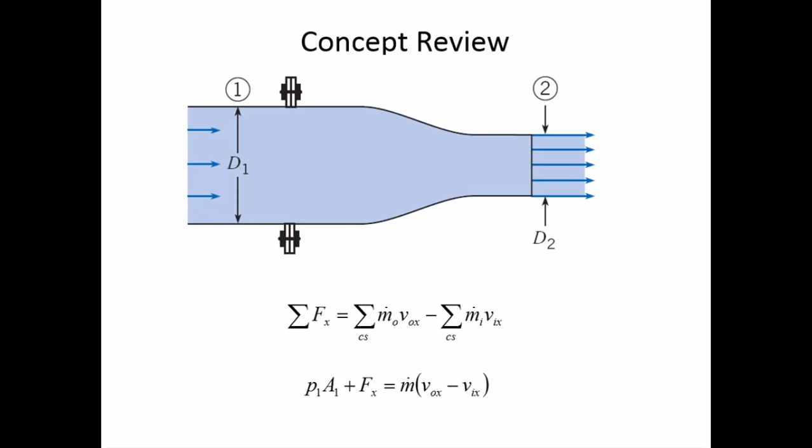All right, let's work through this vane example. We've got a water jet with a speed of 6 meters per second, and the mass flow rate is defined, and it's simply changing direction by a fixed vane. This is actually going to be pretty straightforward because there aren't any pressure forces that have to be accounted for.

It enters with only flow in the x direction, and it exits with flow both in x and y. But it's going to be relatively simple here. It won't be the combination of any other fluid mechanics principles. We start off by knowing that the mass flow rate is 11.3 kilograms per second and that the velocity is 6.0 meters per second.

In this example, we have a vane, meaning that there's a piece of metal, some other material, that's deflecting a fluid jet. So the fluid jet is impacting this and is changing directions, and it exits with a different angle than it did before. The information that we're given is that there's a 30-degree angle between the horizon and the downward direction that this jet of water exits the vane.

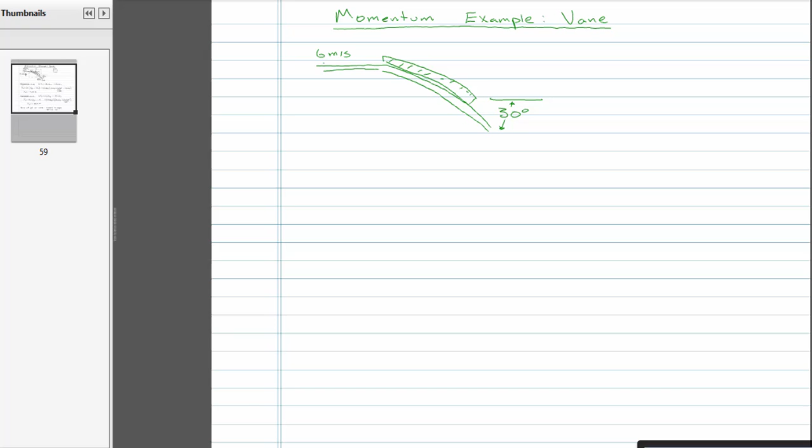The water is 6 meters per second, and we're not given any information about whether it's slowing down, so we assume that it has 6 meters per second as it enters and also as it exits our control surface. We are given the mass flow rate as 11.3 kilograms per second. And it's asking to find the force of the water jet on the vane.

So we have to be careful because normally when we solve the momentum equation, we're solving for the force required to hold the system steady. But this is asking for the equal and opposite reaction. So when the time comes, we'll keep that in mind. First of all, let's apply the momentum principle in the x direction. So momentum in x.

All right, in the x direction, we have the sum of the forces in x are the mass flow rate out, the velocity out in x, minus the mass flow rate in, times the velocity in x. In the x direction, there is both in and out. So this is the flow that's going in through the control surface, and here's the flow that's coming out through the control surface.

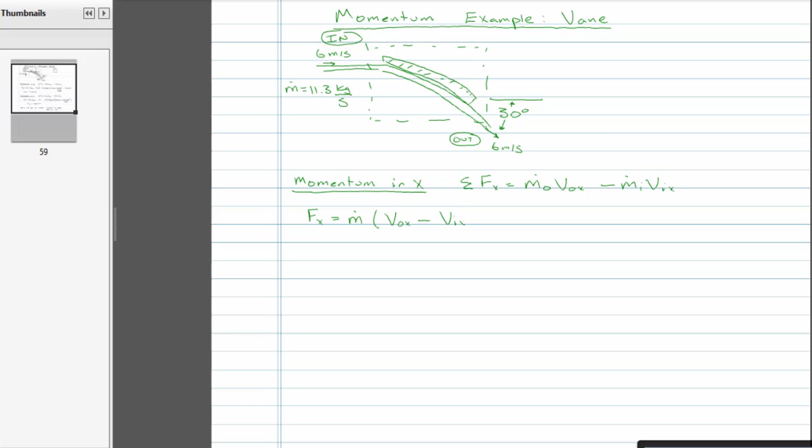The force required to hold the system steady in the x direction will be the mass flow rate. And since the mass flow rate in and out are the same, we can simplify the equation just to the velocity out in x minus the velocity in x, like that. So the magnitude of the velocity is 6 meters per second for both of them, but the velocity out, we want to find just the horizontal component of that 6 meters per second.

So when we make the substitution, it's going to be 11.3 kilograms per second. Now the velocity out in x is going to be the velocity of 6 meters per second. It's a positive 6 because it's still to the right in the x direction. But we have to multiply that by the cosine of 30 degrees in order to get the component that's in the x direction, and then subtract the velocity in x. And the velocity in x is 6 meters per second. That's a positive value because it's to the right.

So the force required in the x direction is negative 9.08 newtons. This cosine of 30 is 0.866, meaning that the flow in is going to give us more momentum than the flow out in the x direction, and that's why it's a net negative value. So that's a force to the left to hold the system steady. If we were holding the system steady with an external force, it would need to be this way. The force would be to the left.

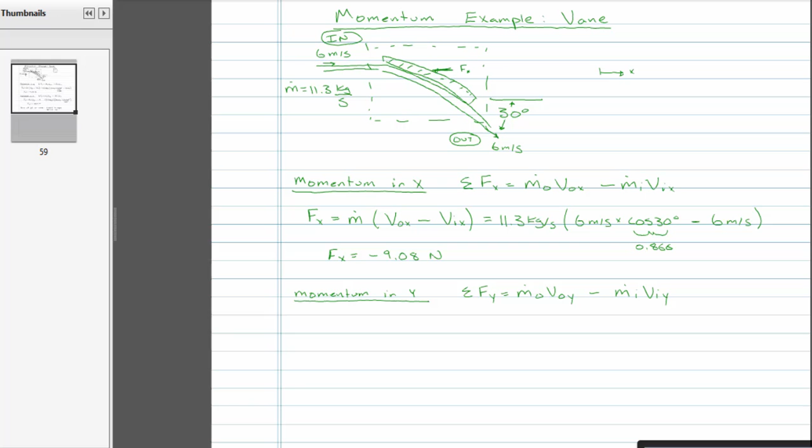The mass flow rate out, we know that the mass flow rate is 11.3 kilograms per second, and then we're going to multiply that by the velocity out in y. Well, the velocity is 6 meters per second, and it's down, so we have to give it a negative sign in front of that value, because down is, in our sign convention, going to be negative since up is positive. And then multiply that by the component of the velocity that is vertical.

So we did cosine of 30 before, so that means we're going to have to do the sine of 30 degrees for this one. And the sine of 30 degrees is 0.5. And again, there's no mass flow rate in term for us to worry about. So the force in y required to hold the system steady is going to be negative 33.9 newtons, meaning that we would have to push down. The jet would cause that vane to rise if we weren't pushing down in the y direction.

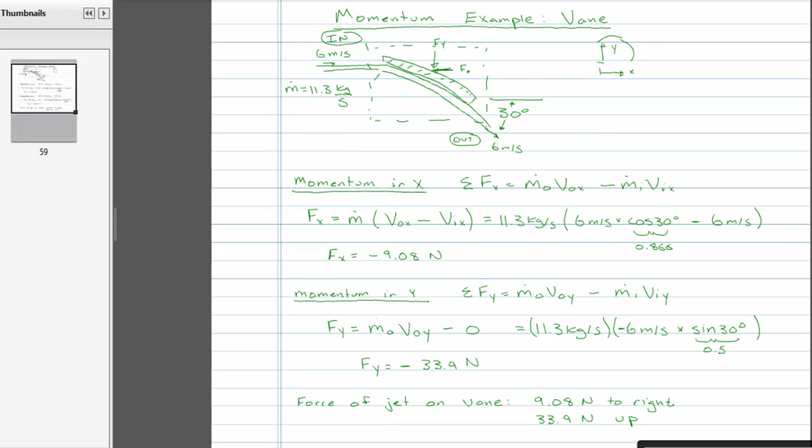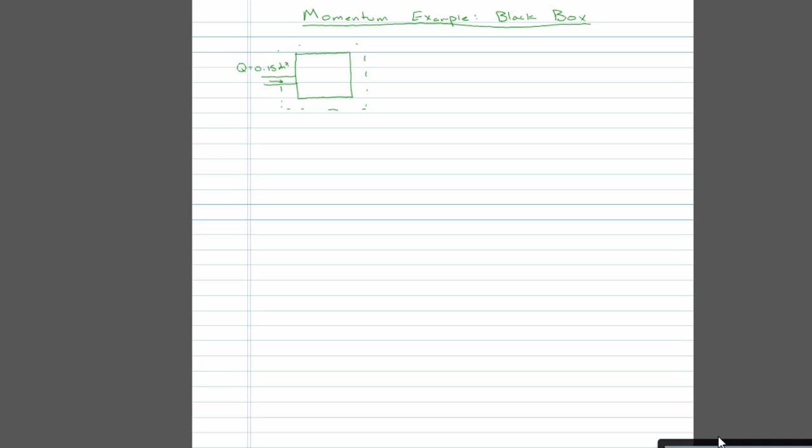There's a jet of water that has a volumetric flow rate Q is 0.15 cubic meters per second, and we're given that the velocity in is 60 meters per second at that boundary. And there's a jet that's coming out right here and we know that the velocity of that jet is 15 meters per second, but we're not given the mass flow rate. There's another jet here that's coming in. We are given both the volumetric flow rate of 0.30 meters cubed per second, and the velocity is 30 meters per second.

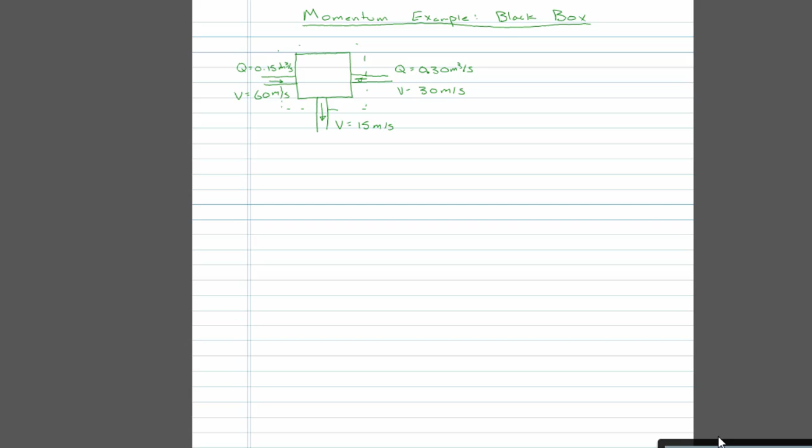And then finally there's another exit stream here, and that exit stream we're given the flow rate to be 0.10 cubic meters per second, and the velocity is known to be 20 meters per second. We're going to have to apply the momentum expression in both the x and y direction. Just for simplicity, I've labeled each of these streams. I'm labeling this stream 1, and then we have stream 2, stream 3, and you guessed it, stream 4.

Alright, let's start by looking at things in the x direction. Consider the momentum in x. So in the x direction, there's no mass flow out. There's only flow in the x direction. So that when we have the sum of the forces required to hold the system steady in the x direction, that's the mass flow rate out, velocity out in x.

And by the way, I should say the sum of the components that are flowing out minus the sum of the components that are flowing in x. So there's no flow out in the x direction. You can see both stream 2 and stream 4 going into the black box. So that means that this term is 0.

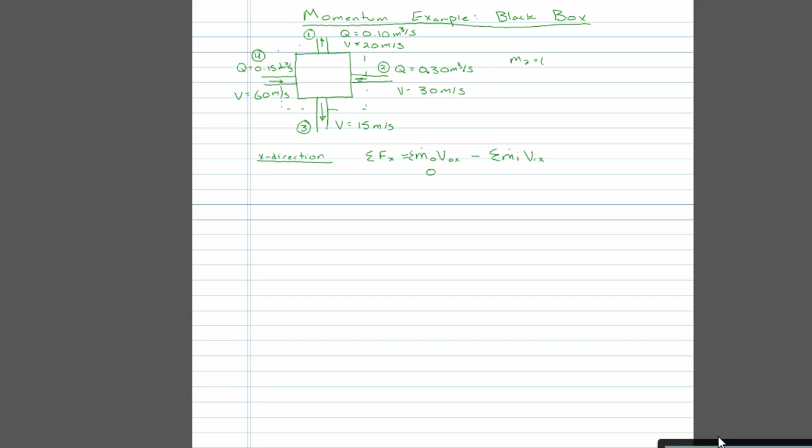Let's take a look at the mass flow rates of stream 2 and stream 4. The mass flow rate for 2 is going to be... this liquid has a specific gravity of 2.0. So for Sg of 2.0, that means the density is 2,000 kilograms per cubic meter, because it's double the density of water. That's what Sg of 2.0 means.

Okay, so the mass flow rate of stream 2 is going to be 2,000 kilograms per cubic meter times the flow rate of 0.30 cubic meters per second. The mass flow rate of stream 2 is 600 kilograms per second. Mass flow rate for stream 4 is likewise 2,000 kilograms per cubic meter. This time though, the volumetric flow rate is 0.15 cubic meters per second. Gives us a mass flow rate of 300 kilograms per second.

Let's apply this in the x direction. Okay, so the force required to hold the system steady in the x direction is going to be the mass flow rate out, which there is none, minus, now it doesn't matter which stream we consider first. Let's take a look at stream 2. Stream 2 has a mass flow rate of 300 kilograms per second, and we need to multiply that by the velocity for stream 2. So stream 2, 300, that was stream 4. So the mass flow rate of 4, and now let's do the velocity of 4.

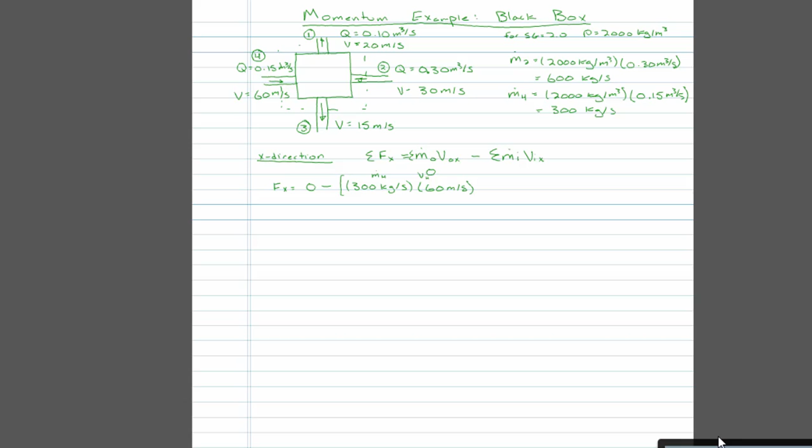Now velocity of 4 is 60 meters per second, and that's to the right, so I'm leaving it as positive 60. Now we will do the mass flow rate of stream 2 and the velocity of stream 2. So the mass flow rate of stream 2 was 600 kilograms per second, and then the velocity is negative 30 meters per second. I should have made that as a plus. I guess it's a negative sign if you don't put the negative into here, but I think it's probably more consistent if I put the negative sign right by the velocity there.

So it is the 300 kilograms per second at 60 meters per second from here at stream 4. And you can sort of tell that you'd have to push to the left in order to hold that steady. But then the other stream, you're going to have to push to the right to hold stream 2 steady. The force in the x direction is going to be canceling out, because 300 times 60 and 600 times 30 balances out. So in other words, those two jets counteract each other, and no external force in the x direction is required to hold it steady, since the two jets counterbalance one another.

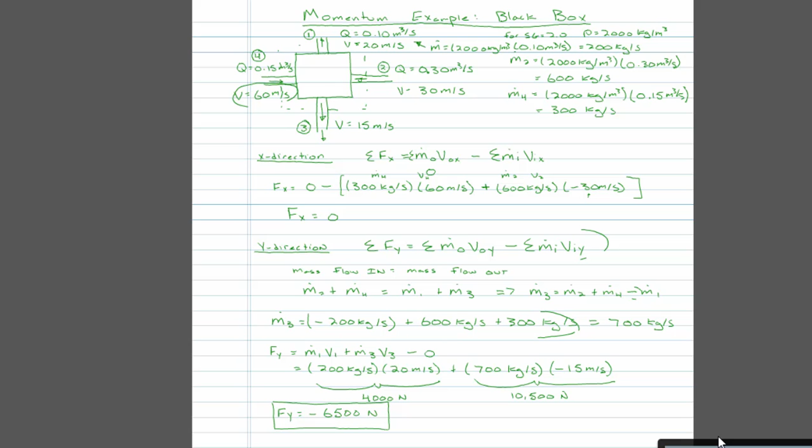All right. Well, the U.S. Navy has a series of boats called LCACs. LCAC stands for Landing Craft Air Cushion. And these are pretty amazing machines. As you can see from the image there, they have the ability to land a full-size main battle tank, or 180 troops can be on the deck of it, or they could put 4 light armor vehicles, which are themselves pretty big machines. They can go about 80 miles per hour, which is a lot faster than an ordinary ship.

An ordinary ship that's down in the water faces quite a bit of resistance to moving at that speed, but an LCAC, by contrast, floats above the water. The curtain of the LCAC, when it's operating, is actually up above the water so that it has much less resistance to movement, and that's why it's able to achieve such a high velocity. And that comes at a cost, though. It burns 1,000 gallons of fuel per hour. Think about what your fuel costs would be.

The engines in these LCACs, if I remember correctly, are able to burn a variety of fuels, but most of the time what they'll put into it is jet fuel. It's actually a gas turbine, and jet fuel is very expensive because it has a very high octane. Jet fuel doesn't combust as easily. It burns at a higher temperature.

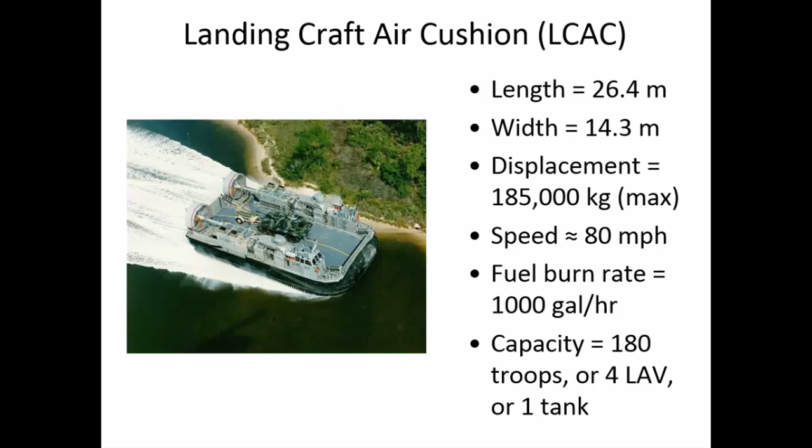And so, like, I was up at the Tri-State Airport a couple of months ago, and they have a flight operations office off the main building there, and they were charging something like $6 a gallon for jet fuel at that point. And so it's $6,000 per hour that you're spending to run one of those things. But when you need to take a tank inshore at 80 miles per hour, then it's your best option, I guess. So it's interesting from a fluid mechanics standpoint as well. Let's take a look at this video, and then we'll talk about the way that the LCAC operates.

It's just to get troops and equipment on shore quickly. Yep. Nope. Nope, but they're fast, and they can clear obstacles too. Like you know, an ordinary boat that's landing troops on shore would have to stop at the beach because it has to only go where the water is. But this could go a mile inland if it had a path free of obstacles. So it can establish a much deeper beachhead very quickly.

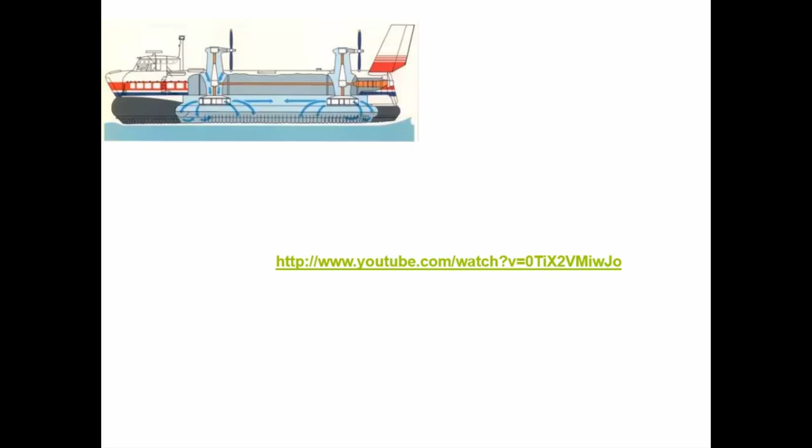Let's take a look at an example that uses this hovercraft as a starting point. We're going to work through this example and try and calculate four things. First of all, just a simple drawing of the LCAC, and I'd like you to try this without watching what I do. I'd like you to sketch, based on momentum, how you think this thing works. How is it able to lift up the load, and how is it able to achieve a forward movement? So do a little sketch in the margin of your notes.

Secondly, I'd like you to calculate the air pressure required in order to lift the fully loaded LCAC up off of the ground or up off of the water. Fully loaded, it's 185,000 kilograms, and the dimensions are 26.4 meters long, 14.3 meters wide. And those are actually real-world figures that I was able to look up.

Third, we're going to go through and calculate the thrust of an LCAC when each of the propellers is 3.6 meters in diameter, and again, that's a real-world figure. They're very large propellers. And in order to calculate the thrust using the momentum equation, you'll need to assume density of the air in order to turn that into a mass flow rate. And so the typical density for air is 1.2 kilograms per cubic meter. And then also you're going to assume that the velocity of the air coming off the propeller is 150 meters per second.

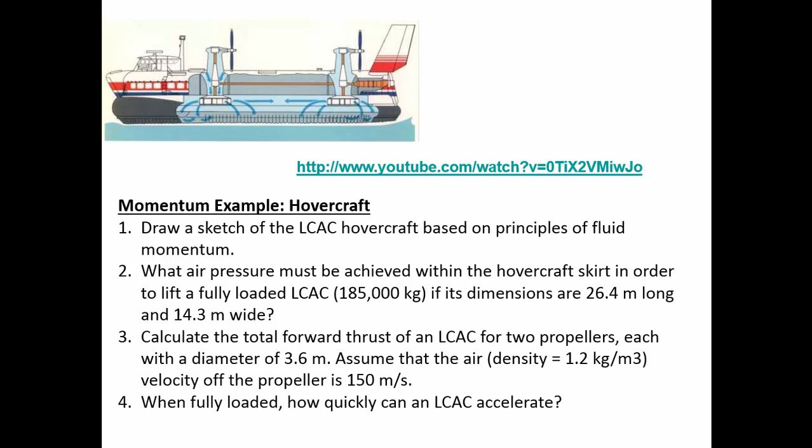In this example, we're taking a look at a hovercraft called an LCAC, and we're going to do some calculations based on the momentum principle. And first of all, we need to draw a sketch of what's happening. Alright, so a conceptual sketch. If we simplify the hovercraft to look like basically just a box with this rubberized skirt that the air is coming down out of, and it's hovering on top of some land. It has weight based on the known mass of the hovercraft and whatever equipment's in it.

And let's draw, by the way, a control surface. To hold the hovercraft steady, if it had like a fan system on top that's blowing air this way, we would want to know the mass flow rate of the air and the velocity of the air, and then this is the force that would be required to hold the system steady. So this is just a basic idea of what the hovercraft looks like. It's the air coming down from the skirt that counteracts the weight force.

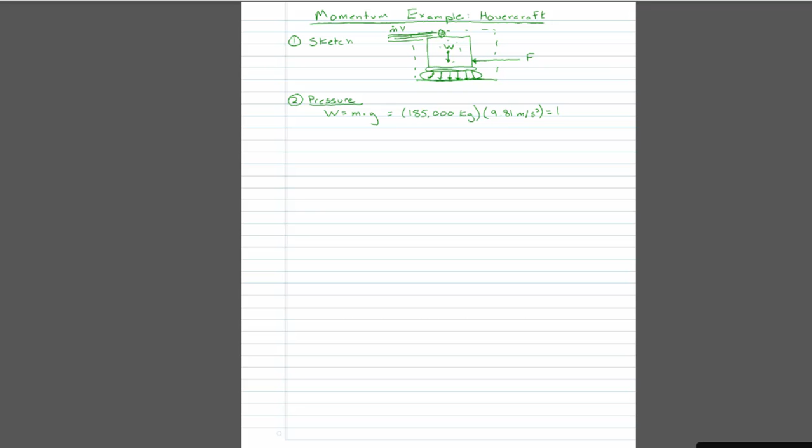And so now in the second part of the example, we're going to take a look at what pressure is required under the skirt in this area, what pressure is required to hold up the LCAC. And we can first of all look at this to find out what is the weight of the LCAC. And the weight is related to the mass times the gravitational acceleration. We're given in the problem statement that this hovercraft weighs 185,000 kilograms, which is pretty heavy. And g is 9.81 meters per second squared. And so the weight of this hovercraft is 1,814,850 newtons.

It's given in the problem statement that if we look down from above on the LCAC, it is 14.3 meters wide and 26.4 meters long. And so the area is just the product of those two numbers. So the area is 377.52 square meters. And the reason why we want to know the area is that this pressure underneath the skirt area that's actually lifting up the hovercraft is simply calculated by F is pressure times area. In other words, we can find the pressure by calculating the force. In this case, the force is the weight that's being lifted up, and divide that by the cross-sectional area.

So the weight divided by the area. And so the pressure is going to be 1,814,850 newtons divided by the cross-sectional area of 377.52 meters squared. And so the pressure is 4807 newtons per meter squared.

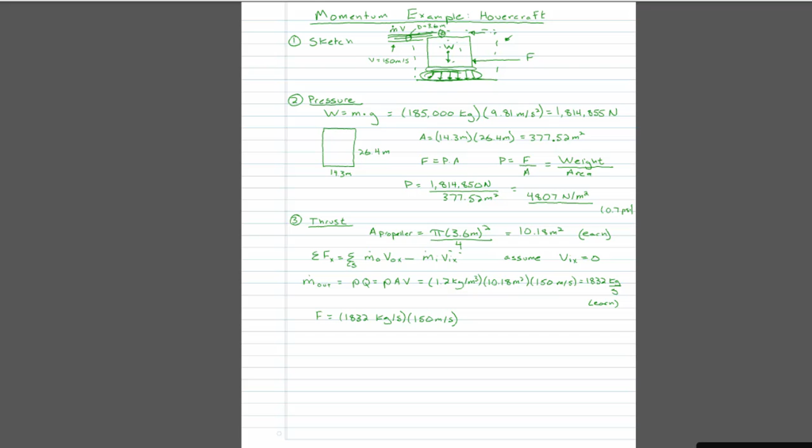So the force is 274,826 newtons each. And so if we double that, multiplying it by 2, then the total force for the 2 thrusters is 549,653 newtons.

And finally, in part 4 of this example, it's asking how quickly can an LCAC accelerate when it's fully loaded. And this will be its initial acceleration, because remember, as soon as it starts moving, then the velocity in isn't 0 anymore, and that's going to reduce the effective thrust. And so it has its most thrust when it's stopped and just barely starting to accelerate. The way that we're going to calculate the acceleration is F equals ma.

We've got a force. If we get rid of that force to hold the system steady, then the system is going to begin accelerating. We can rearrange that. The acceleration is the force divided by the mass. And so the force that we knew for the 2 is 549,653 kilogram meters per second squared. Up here we had expressed the force in terms of newtons, but a newton is a kilogram meter per second squared. I wrote it like that just to make it more obvious how the units are canceling out.